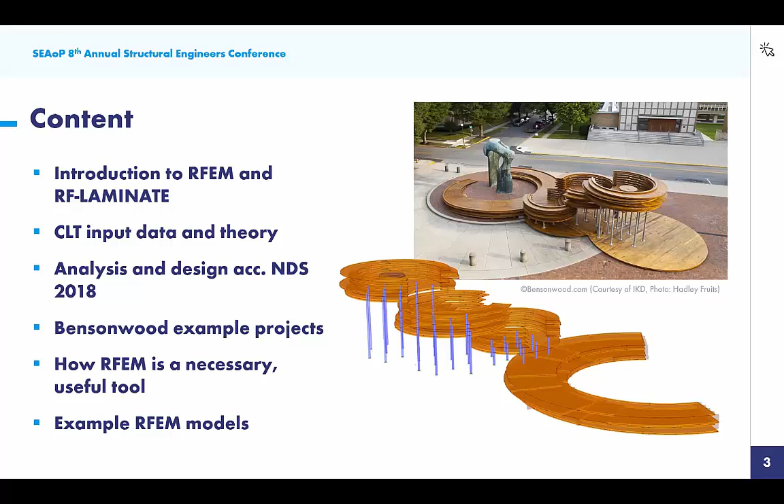Then I'll turn it over to Florian, who is an engineer at Bensonwood, to show you some real-world applications of cross-laminated timber, mass timber, with some example projects that they have worked on. He'll go on to talk about how they found RFEM to be a necessary and useful tool in these projects and to go through a few example RFEM models as well.

So I am going to go ahead and begin within our program RFEM. You can see that this is the main structural analysis program here, RFEM. It will provide a full analysis, so we're talking things like internal forces, deflection, support reactions. We do work with this add-on module concept to provide design of our elements, and that would include today we'll be looking at RF-LAMINATE, which provides design of cross-laminated timber.

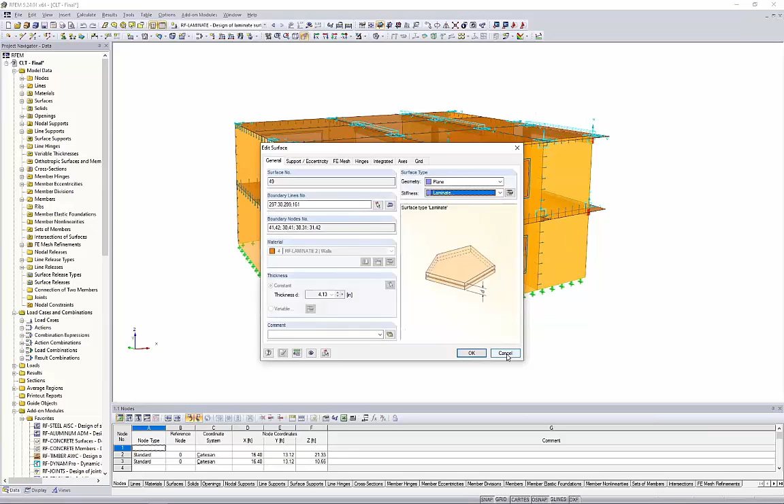For the sake of time, I have already modeled a two-story structure here, and you'll notice that we have several surfaces. If I double click on one of these surfaces, the stiffness type is set to laminate, and this refers to our RF-LAMINATE add-on module, which again we'll get into in just a minute on how we can actually accurately calculate the stiffness properties of CLT panels.

I've also combined this with member elements, so you'll see here glulam beams, which are dropped down below the bottom of the surfaces here for additional support. We have some glulam columns as well, so all within the same project here.

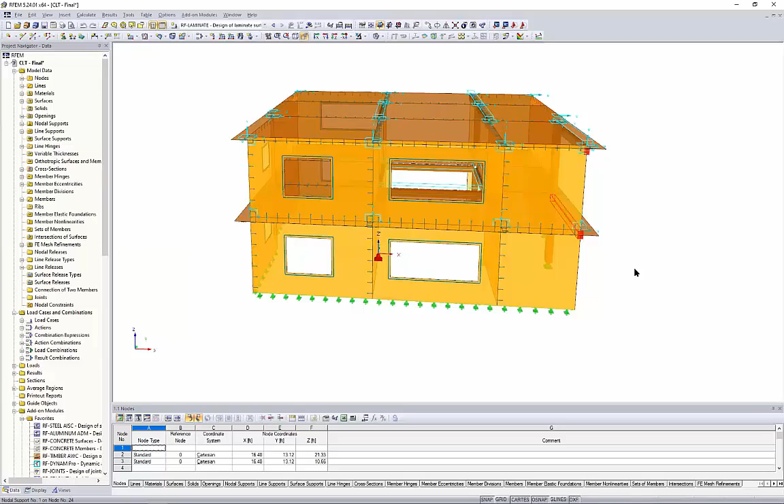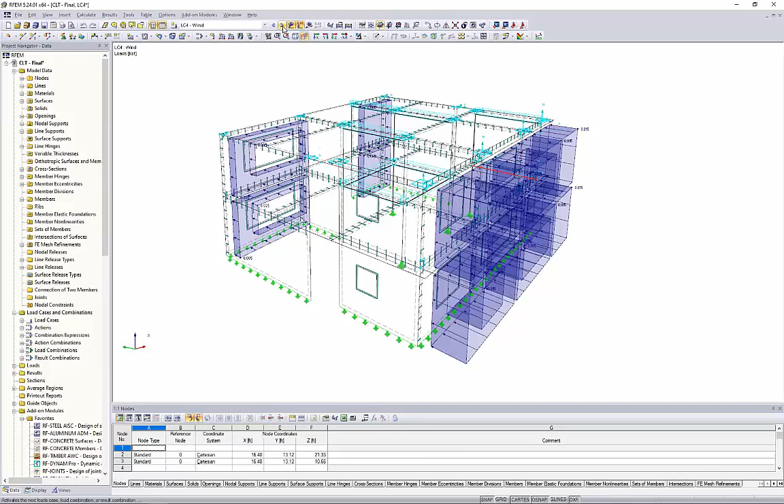I've also applied loads to this structure. These are just general surface loads. You can see here, maybe if I turn this to wireframe, it's a little bit easier. We have a dead load applied to the first level and the roof level here, a live load, simple snow load, again just an application at that roof level, and then we have a lateral wind load. So I went ahead and combined all these load cases into load combinations according to the ASCE 7. When we display these together, you'll see these gravity loads in addition to lateral loads kind of acting on the structure altogether.

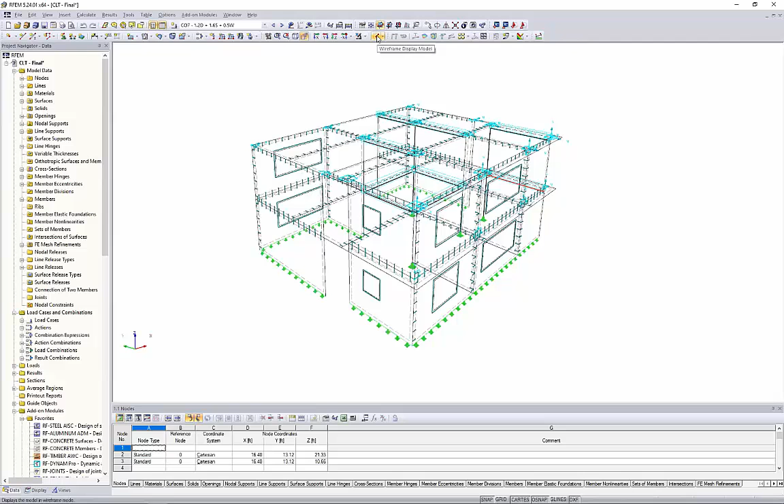But before we run this initial calculation, what's required here is to define the correct stiffness types for our cross-laminated timber. For this, we would utilize this add-on module RF-LAMINATE, and I can access RF-LAMINATE within my project navigator over on the left. When I say add-on module, it's really nothing more than just this dialog box that pops up within our main program.

So before I give you a quick tour here, let us jump back to the PowerPoint to kind of see what's happening behind the scenes with this add-on module, how it's working with RFEM, the main program.

So we know with cross-laminated timber that this is going to be individual layers oriented 90 degrees, and each individual layer has its own stiffness properties. So we're talking modulus of elasticity, shear modulus. In turn, these individual layers have their own stiffness matrix as well. So this is what eventually we're going to be defining within RF-LAMINATE, are these individual layers.

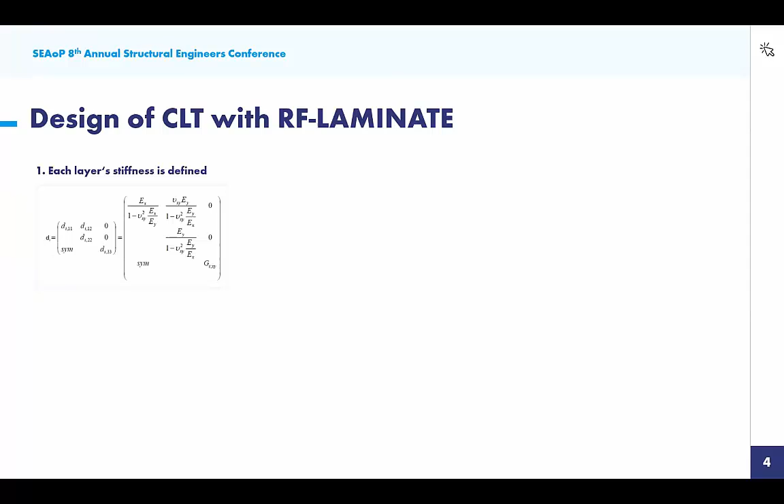Well, what we do with these individual layers is to create this overall panel. And what's required for this panel that we might use for a wall element or floor element is to generate the overall stiffness matrix. We call this the global stiffness matrix here of this panel.

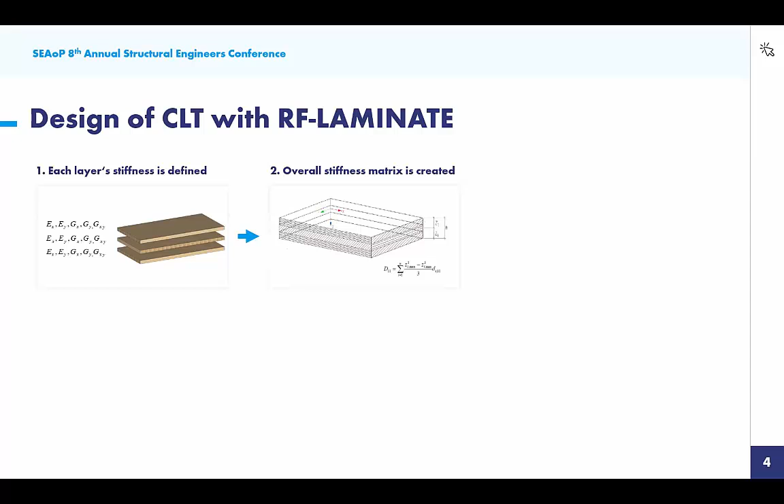RF laminate will automatically do this within the background using laminate theory. So you might see here a sample calculation for the D11 entry of that stiffness matrix.

We take this global stiffness matrix and export it from the add-on module back into RFEM, for the structure we were just viewing. We can go ahead and run the analysis, which includes dead load, live load, wind, and snow load. After running this analysis, we get internal forces for each one of these CLT panels.

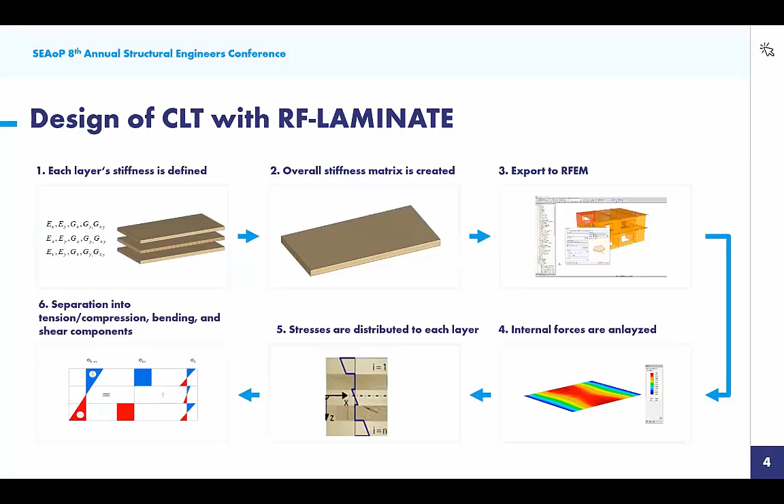These stresses from the analysis are ultimately what we're comparing with our design stresses, or limiting stresses, based on the material as well as the NDS code. From this, we finally get a design ratio for our CLT panel. So that's what's going on in the background here.

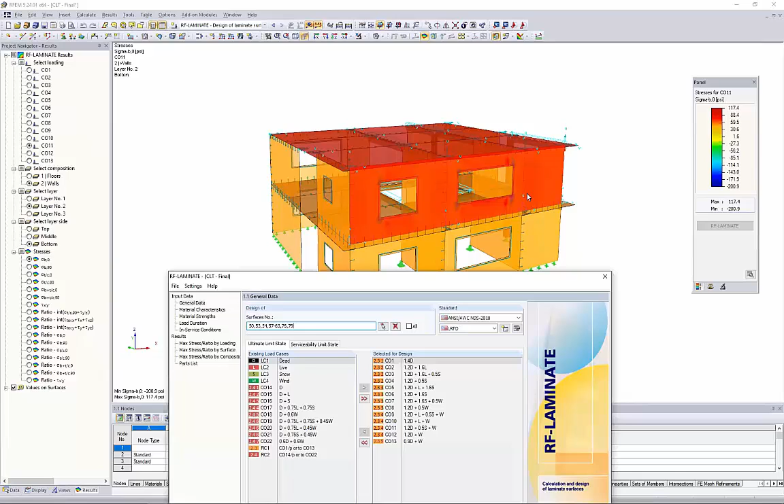Jumping back to RFEM, just to give a quick tour of what this add-on module requires as input, you can see that I can choose the surfaces I'd like for design. Currently, I've only selected the roof panels here as well as 3 wall panels, but we could design all at once if we wanted to.

Over on the right-hand side, we're going to choose our design standard. You can see the NDS - we know recently the NDS added CLT design with the 2015 standard, and we also have the 2018 standard. We have the Canadian standards, since that was recently implemented there too, and of course the Euro code.

For the ultimate limit state design, we would likely move our LRFD load combinations over here to the right, simply because I'm choosing the design method according to LRFD. Notice the ASD is also available here.

We can also check serviceability for these panels - that's deflection checks, and I'll show you later where we can set that limiting deflection ratio. For this simple example today, I'm not doing deflection checks, but we'd probably move these unfactored ASD load combinations over to the right-hand side.

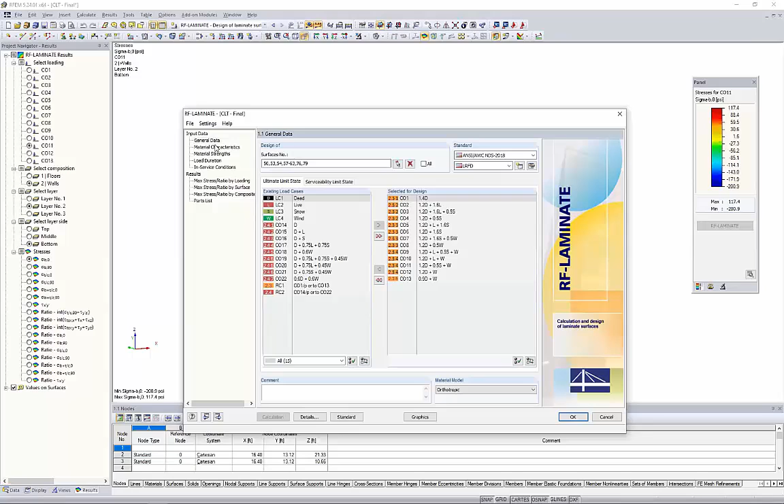It's really as easy as moving down these tables from top to bottom. So we'll take a look at this next table, material characteristics, which relates back to the PowerPoint model where we're defining these individual layers for our CLT panel.

For the first layer, we can access our material database and use our filters on the left to filter to timber. We might choose North America, and the NDS 2018, and here's about every single timber material available within the standard, along with all of the relevant material properties.

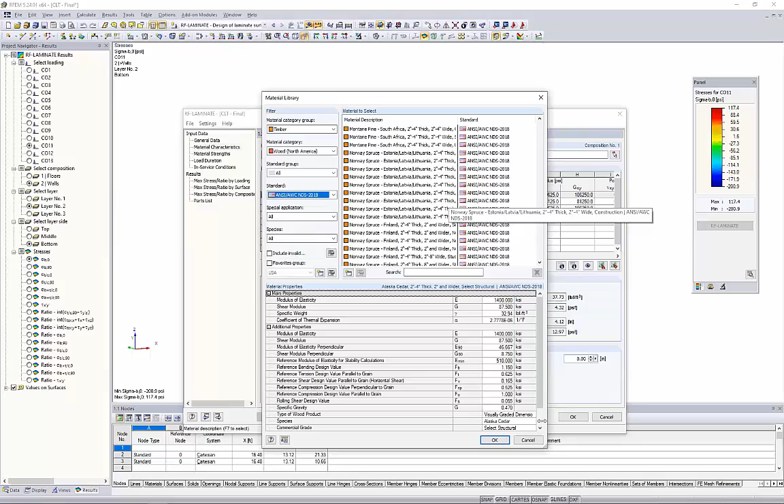You can use these search functions if you need to as well. Once you've determined the material for that first layer, you select it, input the thickness, and notice in this third column is the orthotropic direction - 0 degrees, 90 degrees, 0 degrees, and so on.

That's the definition of CLT, orienting those layers 90 degrees from each other. Then we get the modulus of elasticity and shear modulus automatically brought in from that material database. We'd continue to do so for additional layers, which might be for a custom layup, a custom type CLT composition.

We could save these layers so that we can always use them in a future mass timber project within RFEM. The other option is to import the layers from the library.

Within this option, you can see a drop-down box of various manufacturers. For CLT from the North American market, some names that might sound familiar are Nordic Structures, Smart Lam, Structurlam, and then we just have the general PRG 320. For example purposes, we might move forward with PRG 320 CLT according to the US.

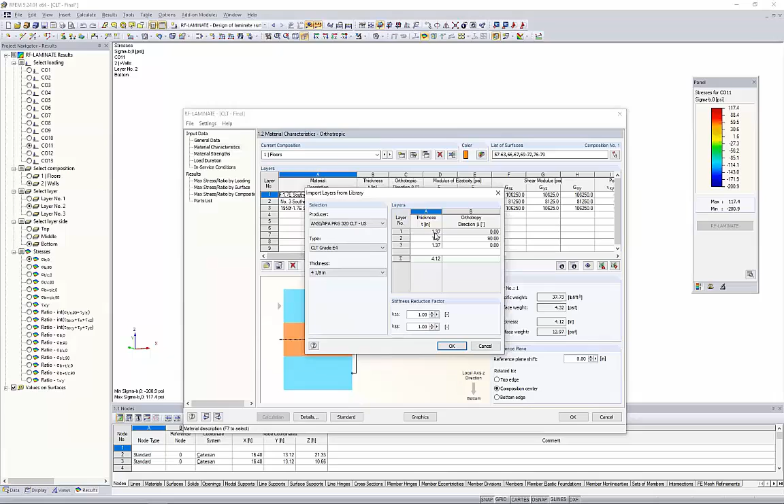Once we select our manufacturer, we choose our grade from the drop-down, then our thickness, which influences the number of layers for our CLT panel. Notice that the layers are automatically brought in, the thicknesses, the directions. When we import that in, this entire table will be filled out for us based on the manufacturer's products. So that's another option if you see your manufacturer in there. Otherwise, you can create custom layups and save them to your library.

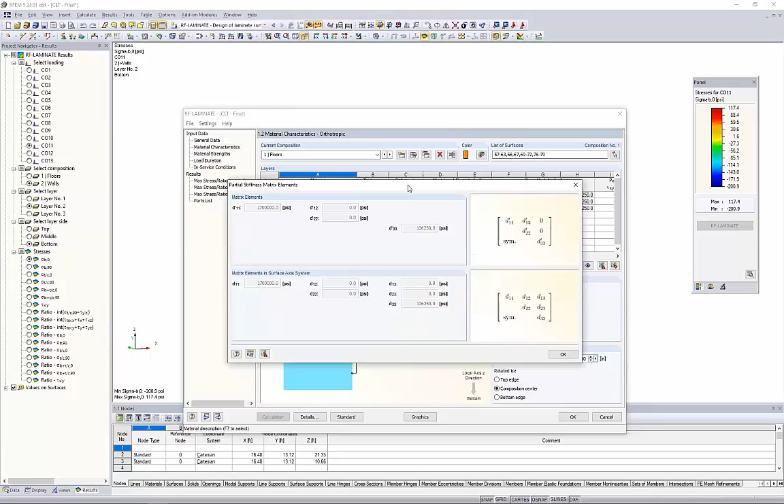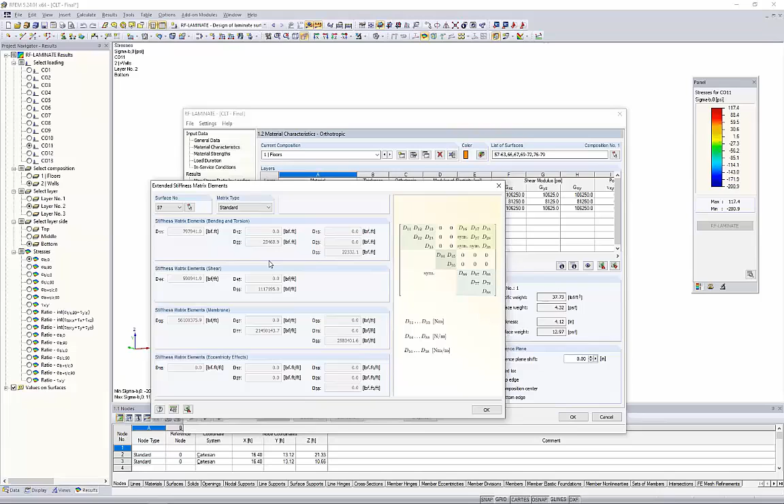Relating back to the PowerPoint, each individual layer has its own stiffness matrix, so we can view the individual stiffness matrix for that single layer. The program takes it a step further and calculates this global stiffness matrix for our panel. If you're not using a program where you can individually define these layers, you'll need to put in the global stiffness matrix into your relevant FEA program. This might be something you get from the manufacturer, but ultimately this is the information we need to export back out to RFEM.

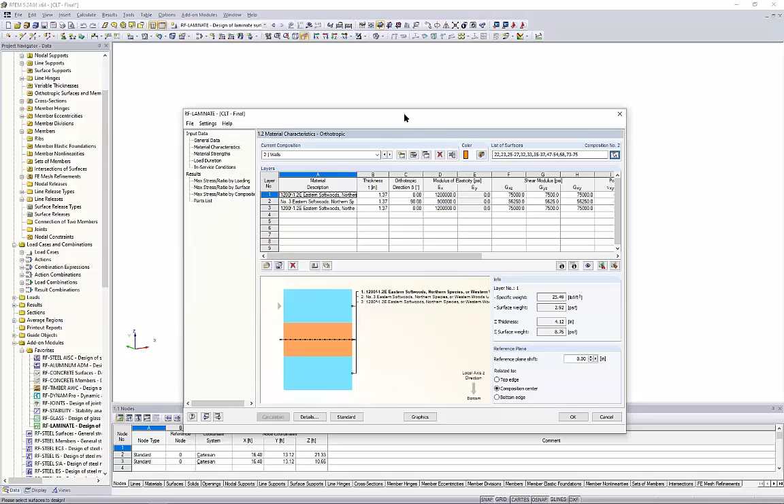I named this composition 'floors' and applied it to all of my surfaces that are floor elements. We can create different compositions for the roof versus the first floor - that's all possible. Exact same concept for my second composition, my wall elements, and this time I also just have 3 layers for my wall elements. Perhaps we have 5 - you can see I've applied these to all of my wall elements back in the RFEM model. Before we move forward, there are some details within these compositions that are really important for analysis.

We can visit those under the detail settings here. You'll notice we have several options we can check on and off, as well as stiffness reduction factors. To discuss this further, I'm going to jump back to this PowerPoint.

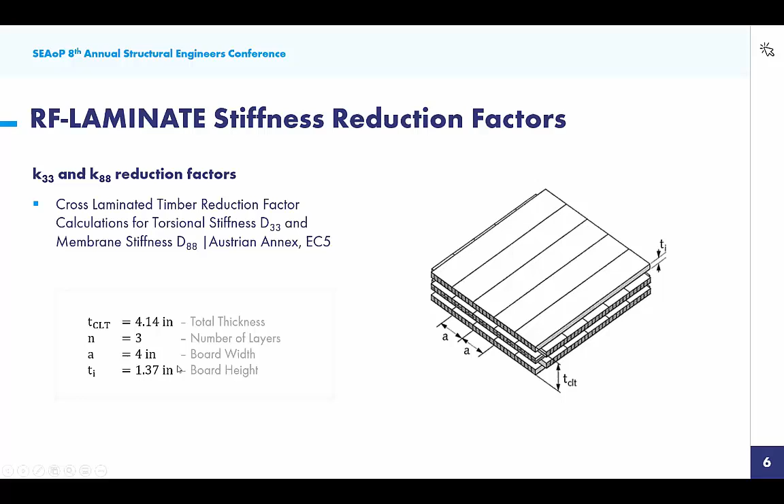We also have some additional variables given directly in the EC5 Austrian Annex. Depending on the number of layers—3, 5, or 7—you'll see variables here, PD, QD, and so on. These are also needed for the K33, K88 equations, and those equations are listed here, laid out quite clearly how we need to reduce the stiffness when we don't have that edge bonding. We take all these variables from the previous slide and from our table here, and we're ultimately calculating K33 as 0.435 in our example today.

This is the information we apply directly in the program under those composition details. Same concept for K88, we're going to apply those directly here. Now, for some manufacturers, these values are included if they don't have edge bonding; for others, maybe we weren't able to get this information. So always double check for your particular project, your manufacturer, and which CLT panels you're using. And again, not specific to RFEM, but this would be a stiffness reduction you'd want to apply with your own analysis tools.

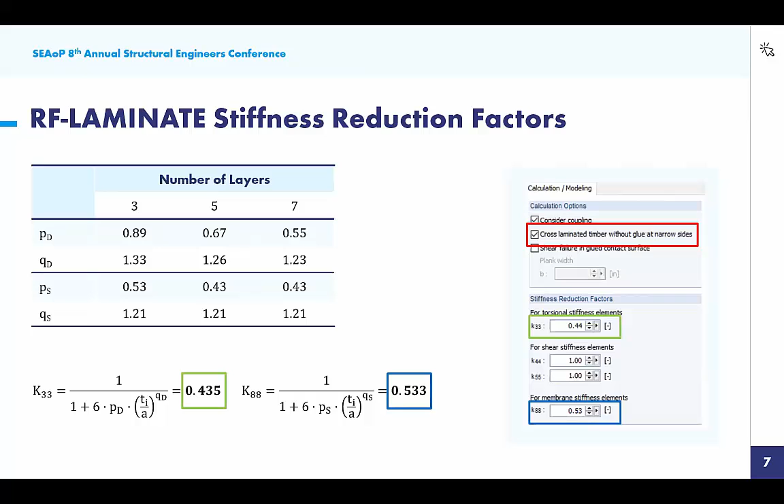The final consideration here for these check boxes at the top is shear failure in glued contact surface, and this all relates to torsion. We're really mostly concerned with torsion when talking about CLT wall elements loaded in plane—probably not so concerned when talking about floor elements, for example. This is also only a concern when we don't have glue at the narrow sides again, so this first checkbox must be checked. That will make this third checkbox available so we can take a look at torsion considerations.

Just a small tip: it's really important to set the FE mesh back in RFEM. Our FE mesh settings for the length should be approximately equal to the board width—in our case, that would be 4 inches—just for the most accurate analysis.

Once again, the NDS standard, the CSA standard don't address torsion whatsoever, so we refer back to the Eurocode 5, the 2010 version. I think we're all kind of in agreement that the European standards have been doing cross-laminated timber much longer than what we've seen here in North America, so it's pretty safe to say we can refer back to these standards for considerations such as torsion.

Once again, complete interaction equations are given quite clearly directly within the standard, and we can see those interaction equations in the lower left corner here. This includes 3 different terms: the first term shown on the right-hand side, the second term lower right-hand side, and then the third term would be those internal forces and stresses directly from the RFEM analysis, to ultimately give us our design ratio for torsion for our wall elements.

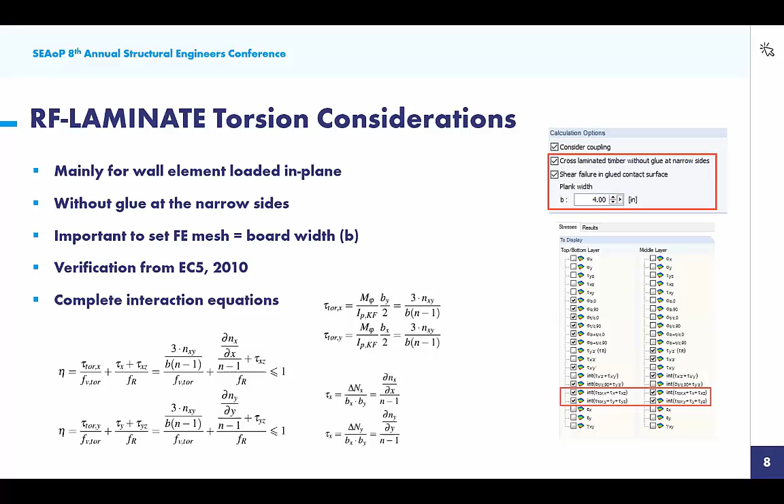Over on the right-hand side, you'll see we have all of these different stresses available to us within RF-LAMINATE, and it's pretty overwhelming. So what we've tried to do is only check the boxes that are relevant for CLT design. This includes the top and bottom layers as well as the middle layers, and torsion is actually not one of them checked on by default. I'll show you in just a minute how we can go ahead and turn those on in order to take that into consideration for our results.

So we'll go back to RF-LAMINATE. If you remember, we still have this dialog box open, and we're currently looking at my wall elements, and we are considering coupling. We don't have glue at the narrow sides. We are concerned with torsion, so we want to go ahead and put in our plank width, or board width, equal to 4 inches.

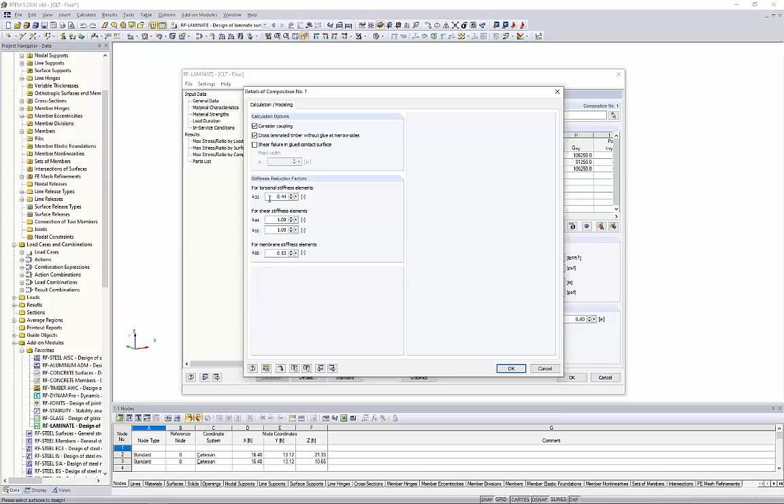And just like I showed in the PowerPoint, I calculated K33 and K88, which I'm inputting in here as well. So for my floor elements, if we jump back to those, same exact concept, but I'm not concerned with torsion here.

So we can leave that option checked off, but we're still applying that stiffness reduction factor K33, K88. Once we have input all this information for those material characteristics, we can jump down to our next table, material strengths. Really not much to do here; everything is brought in from that material library. It's just showing us the strengths for bending, tension, compression, and shear. This information, based on the material properties in addition to the NDS factors, is what's going to give us our limiting stress values.

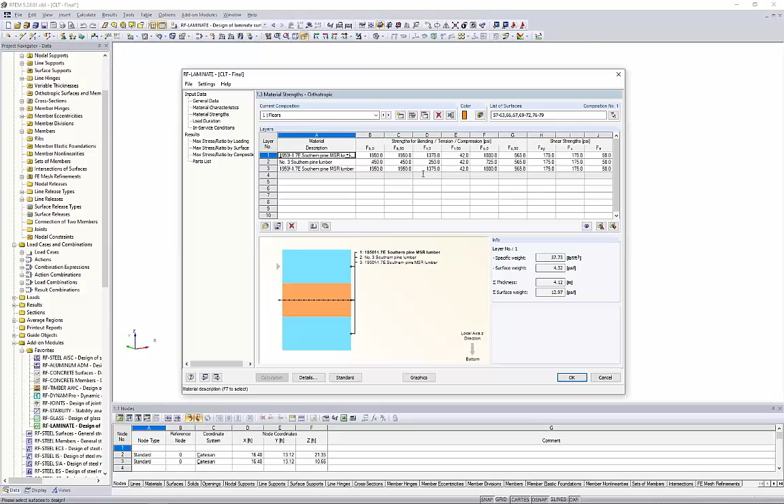And when we're talking about the NDS factors, we might be looking at the load duration factor, which we can see is set within this next table. So dead, live, snow, wind—we would set the load duration factor here. In-service conditions: is your CLT panel dry, is it wet, what is the temperature it's sustaining? All of these factors are actually found under the standard tab.

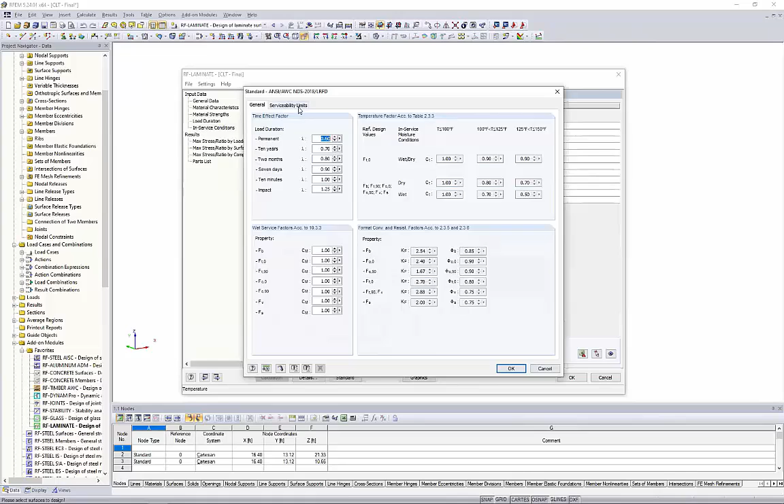So we can see here the relevant factors that are going to be applied for design purposes. You'll also notice the second tab here, serviceability limits—that's what I was talking about. We can also check deflections, where we set this limiting deflection ratio directly within the program. We're not checking serviceability today, so this isn't applied, but just to let you know it is available.

So before we're ready to run our calculation, remember I wanted to turn on the torsion checks, so we can do that under the detail settings. And once again, here's this long list of all these different stresses that we can compare and give design ratios—way too overwhelming. So we have just the default settings here, which is likely most relevant for your CLT design, but here in the lower portion is where we can activate the torsion checks as well.

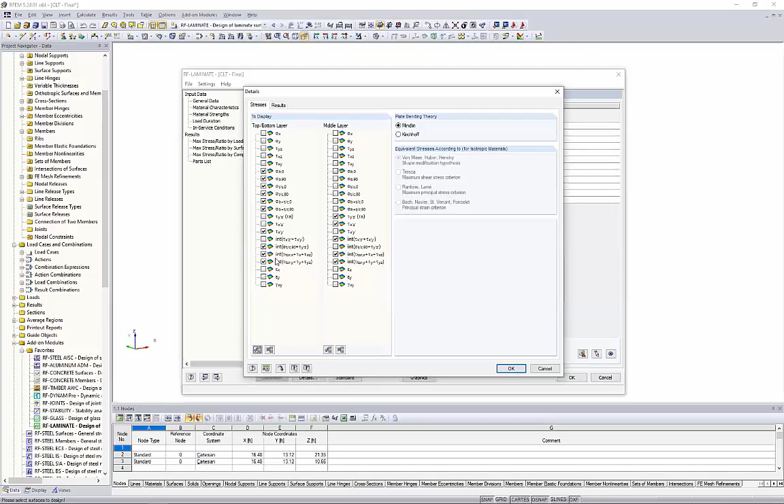So we're almost ready to run that calculation, but before we do so, let me jump back to the RFEM program. Again, this is just our main structure, and you'll notice that we have all of these blue symbols shown everywhere. So we might be wondering, well, what are these used for and why are they relevant? Again, incredibly important for the true properties here of our CLT structure.

So let's begin with a couple of adjacent panels, and I'll highlight these and we'll take a look at just the visibility by these selected objects. So two CLT panels side by side, and I'd say in most FEA programs, when we're modeling two surfaces side by side like this, the program is going to assume that we have a fully rigid connection between these two panels. And we all know with CLT design that that's not the case.

Rather, we're going to be utilizing some type of screw connection, where we have this partially fixed connection, but definitely not a fully rigid connection. That's why we would utilize in the program what's called a line hinge. So when I double click on this line hinge, you'll notice I have the ability to fully release the moment between the two panels. So that's probably one consideration we want to take.

We also have the ability here along the joint length to set some type of spring constant, and this might be for the slip of those screws between the two panels. For my example today, I set this to 30 kips per square foot, but this would all be relevant to the type of CLT connection that you're using for your projects. The other 2 degrees of freedom here, translation in the Y and Z direction, are left at fully fixed.

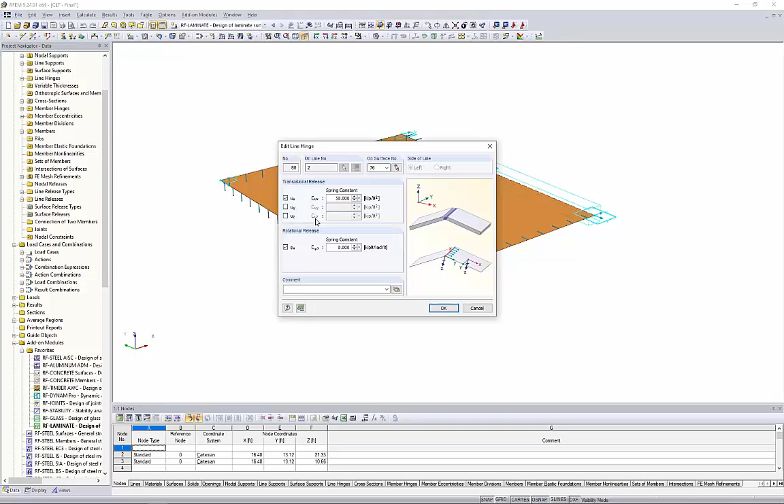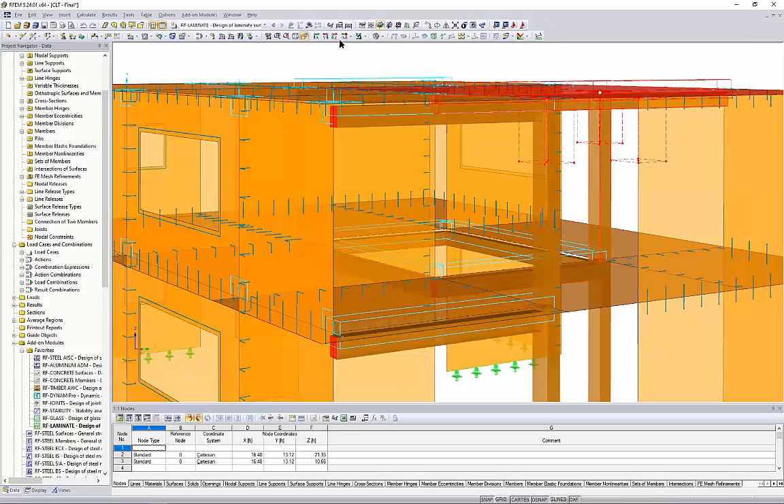So this is definitely something that you need to apply, and this is why you're seeing, when I cancel out of this visibility mode, these line hinge symbols shown everywhere throughout the panel connections. The other symbol that we're looking at here are these long blue lines. And for this, let me go ahead and create a user-defined visibility here, just so that this is a little bit more clear.

Similar to our adjacent panels, we have these beams that drop down below the CLT panels for additional support, these downstand glulam beams. Very similar to what we see with the CLT panel connection when they're adjacent to each other, this assumes a fully rigid connection between this beam and the CLT panel. We know that's not the case because of these screw type connections, so we need to adjust this fully rigid connection here.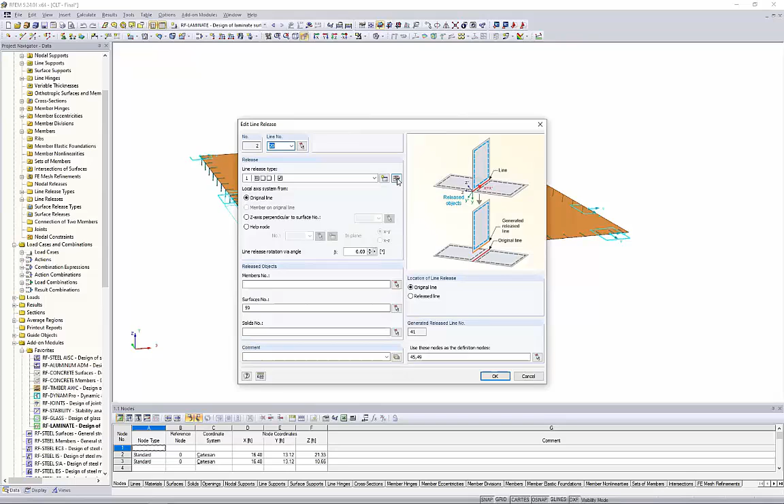We do so with what's called a line release. When I double click on this line release, it's actually very similar to a line hinge, just a little bit more applicable to beam to panel connections. With this, we can define the line release type by releasing the moment, and we can see that here. We're also going to apply that stiffness slip to the joint along the local x-axis of the line, so 50 kips per square foot. The other two we kind of leave as fully fixed.

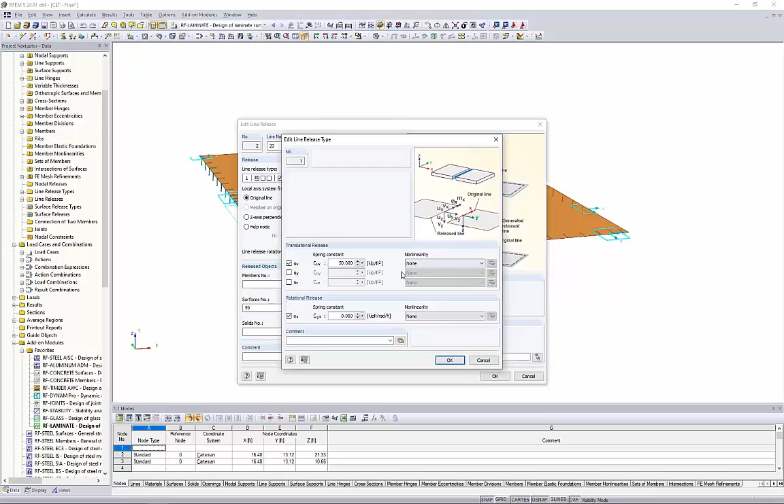Now another advantage of a line release over a line hinge is the ability to define nonlinearity, so you're going to see here friction, partial activity, and so on. Where this might be relevant is in the vertical direction. Maybe we have a scenario where we'd like full force transfer when the CLT panel is bearing down on the member, but in the event of uplift, we want that to be completely released. That's all possible with these nonlinear applications. So that's why we have these line releases everywhere a beam connects to the panel above it.

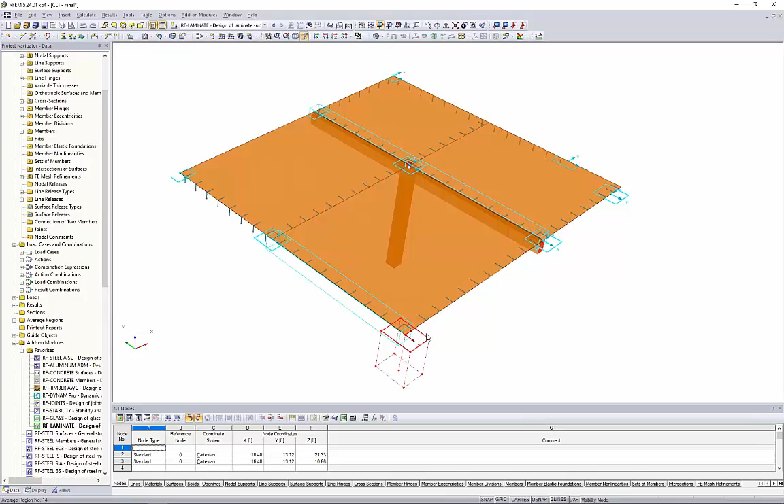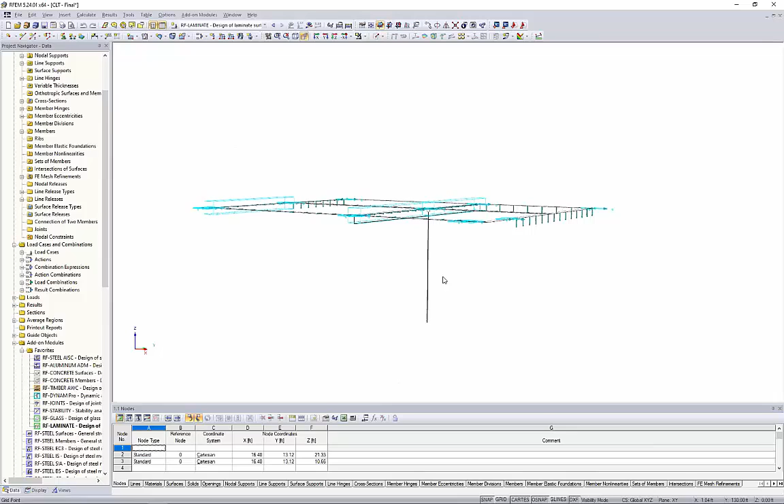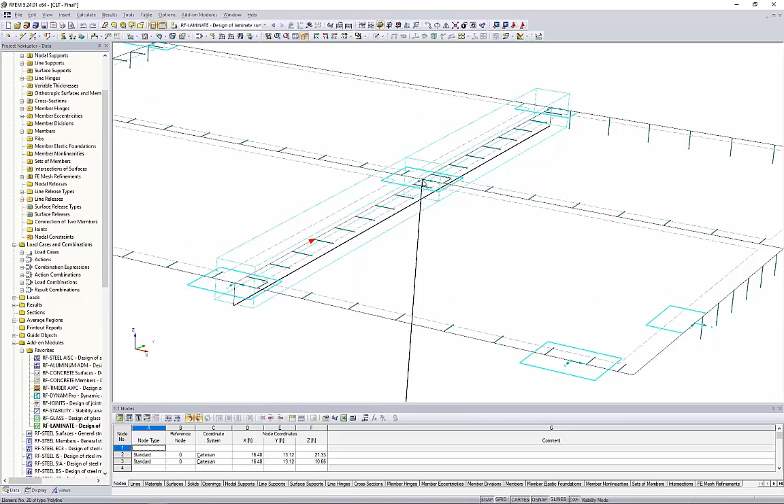Now the final application here, which we'll notice, is these rectangular blue squares. These are used for singularities. Where might we see a singularity? Well, we convert this to a wireframe view, and we know from general FEA programs—this is true not just for RFEM but for all programs—that members are represented by single line elements at their centroid. So this column is just a single line element, framing into these 2D surfaces at a single tiny FE mesh point. You can imagine the amount of stress or internal forces, this huge spike we're going to see at that single FE mesh point, simply because we don't have great load distribution. So again, this isn't unique to RFEM, but singularities happen in all FEA programs, and you have to find some approach to level those out.

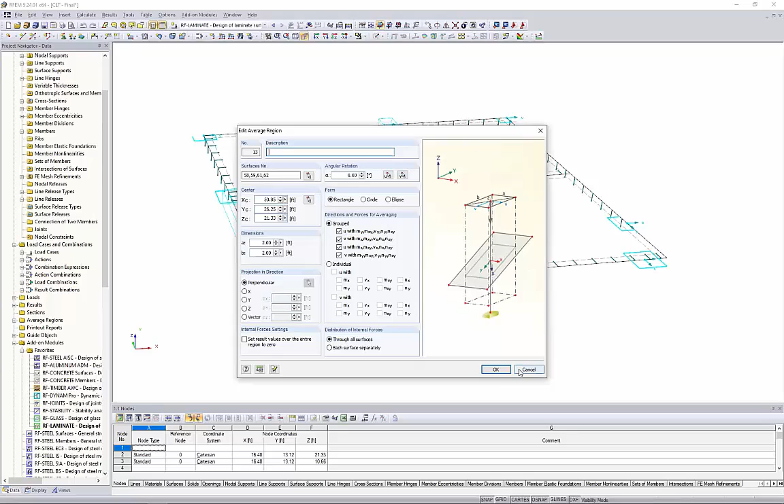In RFEM, we can apply what's called an average region at these locations. An average region is exactly what it sounds like—it's going to average out the forces over a specified dimension. I've set here 2 feet by 2 feet, averaging out the forces in all four directions, and we can smooth out those high peak forces, internal forces and stresses that we know aren't going to exist in a real life application, but aren't really avoidable when we're talking FEA design.

So canceling out this visibility mode will explain why we're seeing all of these blue symbols everywhere. Now these average regions can also be taken into consideration within the add-on module RF-LAMINATE.

So once we've applied all these line hinges, line releases, and average regions if necessary, we're finally ready to run the calculation. We'd hit calculation here within our add-on module, and we're presented with our results in table format, where we can view the max stress ratio by surface, for example.

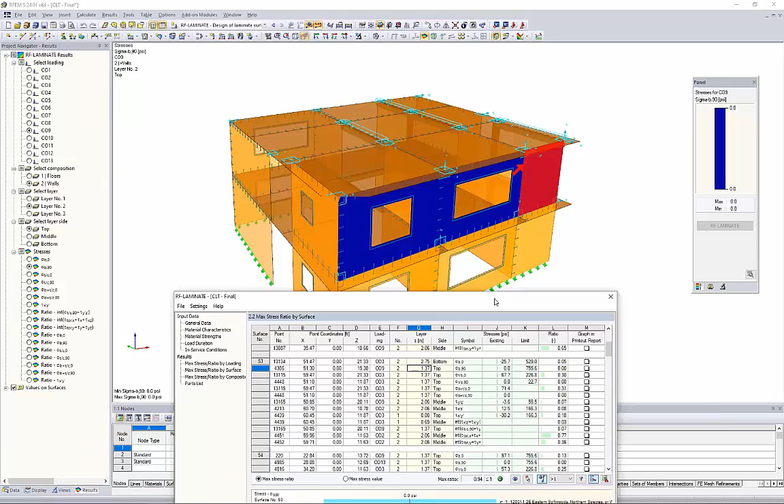If I pull this down here, you'll notice as I'm scrolling through this table, everything's synced up in the background to highlight the surface I'm looking at. It might be a little difficult to see, but there's a red arrow pointing exactly to where my controlling stress point is for that particular check. That's a nice feature if we're trying to see relative to the table, in the structure in the background, exactly where we're at.

Taking a look at the actual data presented in this table, we're going to see each individual surface in each one of these categories. We'll see the bending stresses, tension compression stresses, combined bending tension compression as well as shear. This does include rolling shear checks as well, and those torsion checks we've also activated.

Within column J here, we're seeing the existing stresses, purely from the analysis, which if we remember back to the PowerPoint, we're bringing in these stresses and separating them out to each layer into bending, tension, compression, and so on. Column K is the limiting stresses, based on the material as well as the NDS standard and those factors being applied. Ultimately in column L, this is where we're getting our design ratio.

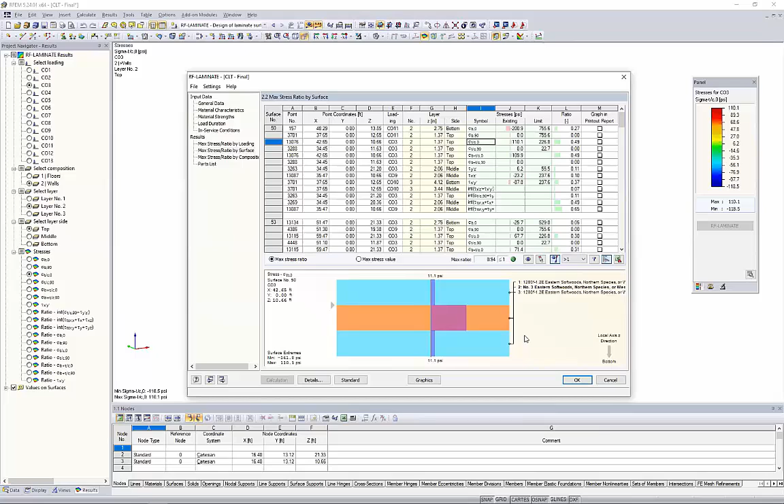We can go ahead and filter this information, or export at the click of a button to Microsoft Excel if we need to sort further. Ultimately, we're seeing a max ratio here of 0.94 for our example today. We have our green smiley face because it's less than 1.0. As we know from the PowerPoint, I talked about the stress distribution for each of the layers, and we can see those stress distribution diagrams shown here as we click through all of these different applications.

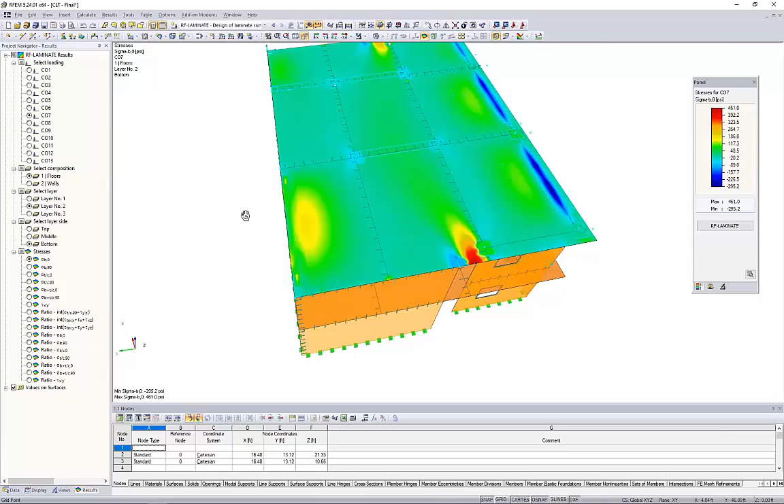In addition to all this information being shown in table format, we can always jump to the graphics view, the results from RF-LAMINATE. We can see it selected in our drop-down box, viewing them graphically back in RFEM. We can scroll to different load combinations if interested in those results. We can take a look at our wall elements, but we can also switch to our floor elements, and with additional options we can examine those further.

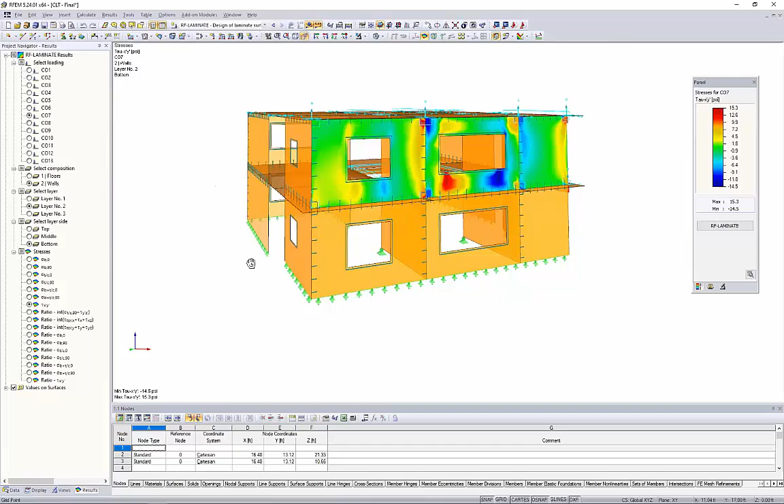For floor elements, we might be interested in the bending stresses, for example. We can also take a look at the tension compression forces, and shear, of course, is something we're also considering. Jumping back to our wall elements, we're probably most interested in shear, but things like tension and compression are also shown. And of course, we can view the design ratios in color formats as well, so we can print these pictures into our report and view the results in something other than table format with numbers.

Hopefully this was just a quick introduction to CLT design. Some of the information to take away from this first part into your own programs or design methods is consideration of the global stiffness matrix—do we need to reduce some entries such as D33 and D88 if we don't have glue at the narrow sides? And back in the RFEM model, things like line hinges to make sure we don't have a fully rigid application between adjacent surfaces, line releases, and so on.

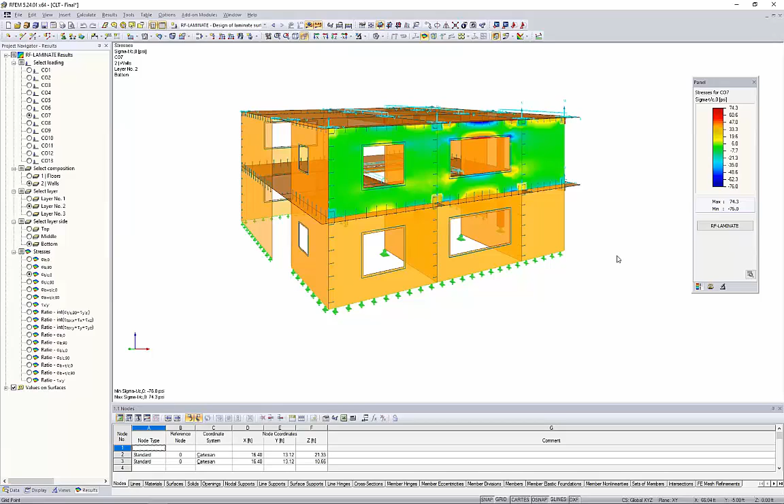With that said, I will go ahead and turn it over to Florian for the second part of today's presentation.

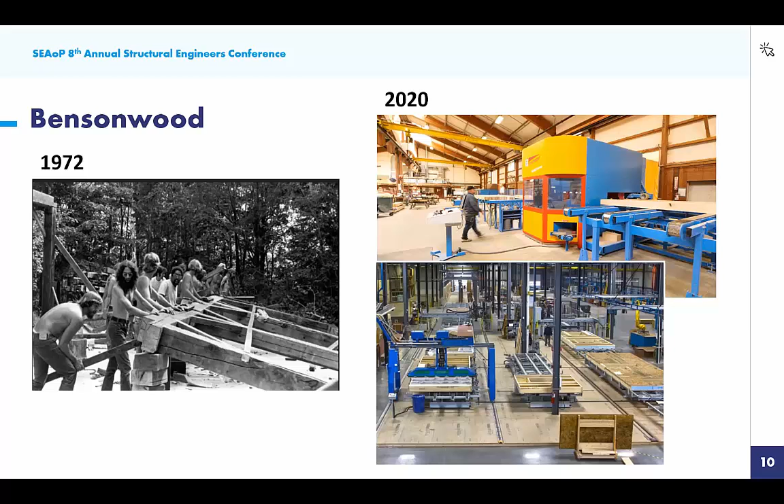The lower picture is our panel shop that we opened in 2017. It's highly automated. The panels get built and transported through the shop on some kind of car, moving along. The nailing is automated, and on the left you can see where the cellulose insulation gets filled. A little later in the shop they get put upright and windows get installed - that's what it looks like today.

All right, enough about Bensonwood.

This is the first project I wanted to show - it's called the Conversation Plinth. It's more of an art project than a building. It was open to the public - you were able to walk on there and stand on top. But it was just a temporary construction. It is CLT, and it's not really protected - it's outside, so it was just a temporary installation.

But of course it had to be fully calculated because people were using it. The project is made out of hardwood CLT, which is pretty unusual. There was an initiative in Indiana to promote the use of locally grown hardwood, so they came up with this installation and a custom layup of hardwood CLT.

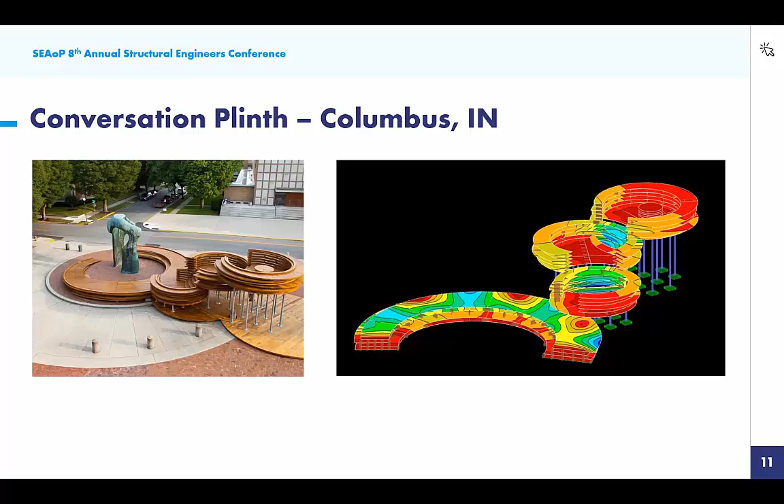All right, I think that's it about that project. The next project I would like to talk about is this Haus Gables in Atlanta. The architect on this is Jennifer Bonner.

When this was designed, she had in mind to really celebrate the use of CLT. So everything in that building is basically CLT - the walls, the roof panels, the floors, partition walls, even the guardrail for that balcony. She was really trying to use it as much as possible and test out what's possible with this somewhat new material.

There are no beams in this roof structure or in the floors. It's all CLT floors that support themselves, and then there's some walls, but especially in the roof, you can see how this could be utilized.

The only steel beams are in here. You can see those too, because the span was a little too long and the wind deflection didn't quite check out. There's no floor behind this, and we didn't want to increase the wall thickness just because of that one situation. So we have two steel beams in there, but everything else is just CLT panels.

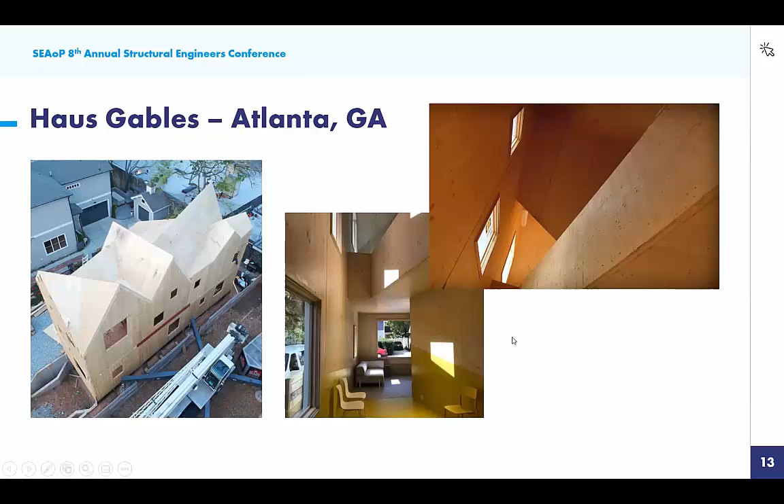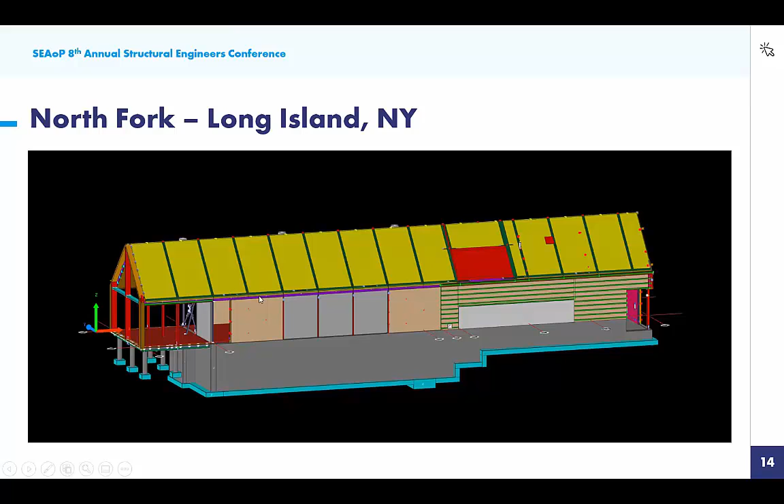This is a project on Long Island, a collaboration with Lake Flato, the architects. What we were trying to do here - let me skip ahead a bit - this centerpiece from here to about there has no floor inside, and they didn't want any tie rods in there. Moment frames didn't seem feasible, and spanning a ridge that long wasn't really an option. They just wanted one great open space.

It's about 50 feet long, and so what we came up with is using the roof - a CLT panel you can't see in this picture - in the roof, stitching them all together and creating this as a deep beam diaphragm. So you wouldn't need any tie rods or moment frames; there's just these braced frames at the end to take all the wind load and outward thrust that otherwise needs to get resolved from here to the end.

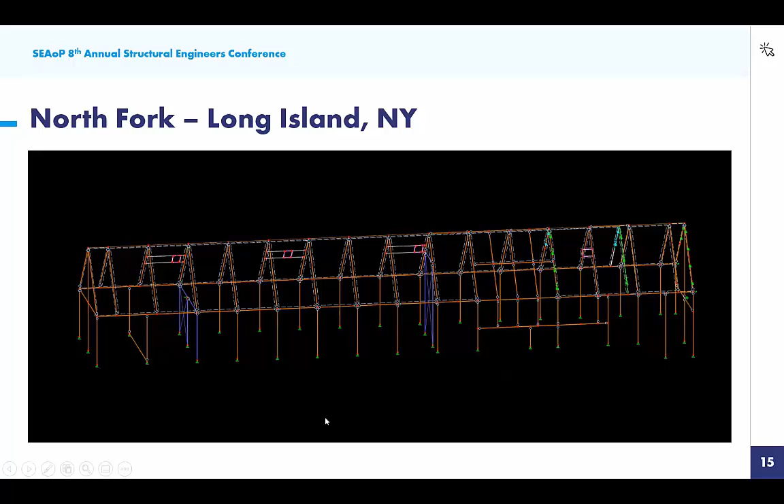This is the catwalk model that we used, and then this is the RFEM model. For this project, I'm actually going to switch over here. So that is the actual model. I did also work on that, so I can talk a little bit more about this one.

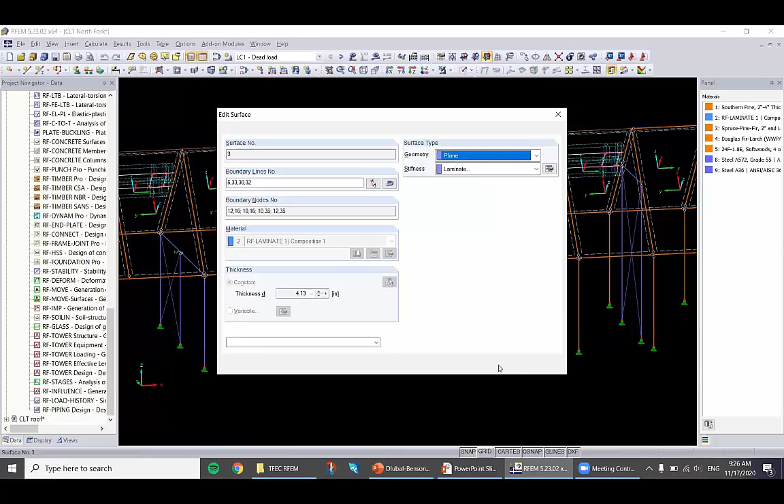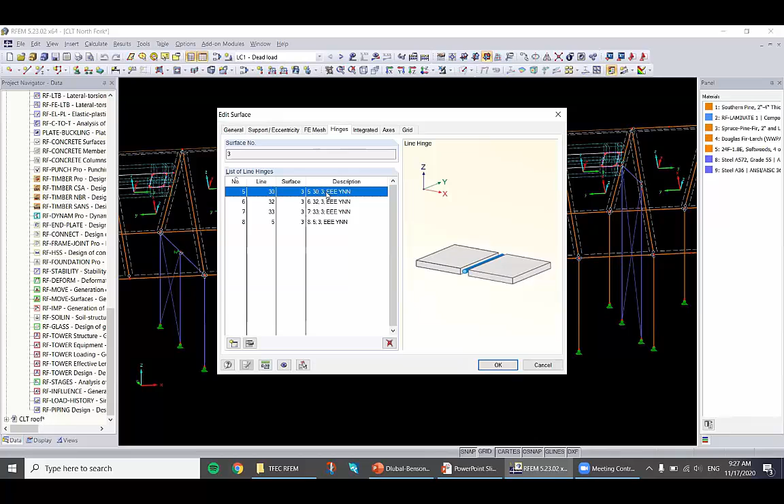I'm going to open one of those panels. As Amy explained earlier, we're using the laminate module here, so the whole built-up is defined in the other module. I'm opening this to show how those hinges work. On all four sides of this panel, there's hinges defined, and the rotational release is always set to zero because obviously there's no moment connection there. And then we went so far as to define all three of the other connections with springs.

This is a bit of a process, but it's very important to get right because it has a lot of influence on the stiffness of the whole building and deflections. The way we did it here is we would build the model with all this set to infinite stiffness, then run the calculations, look at the forces, and come up with a screw size and screw spacing that would work.

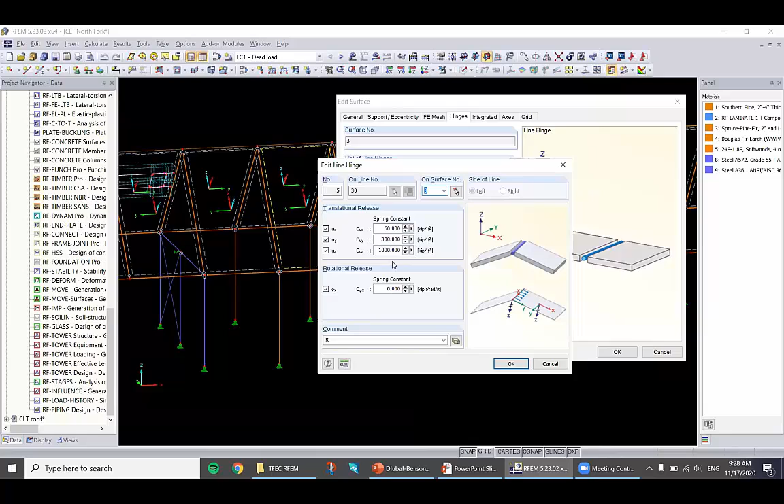Then we put this into an Excel sheet, looked at the stiffness that would provide, and put that stiffness into those boxes, ran the calculations again to see if the deflections and forces check out. We do this for a couple of iterations until we're happy, until we don't feel like there's a ton of screws - even though there still are - and the deflections are still acceptable.

That kind of process needs to get done for a lot of those connections. This one here is different because we're collecting a lot of the load along this one where the braced frame is. I'm going to show some results.

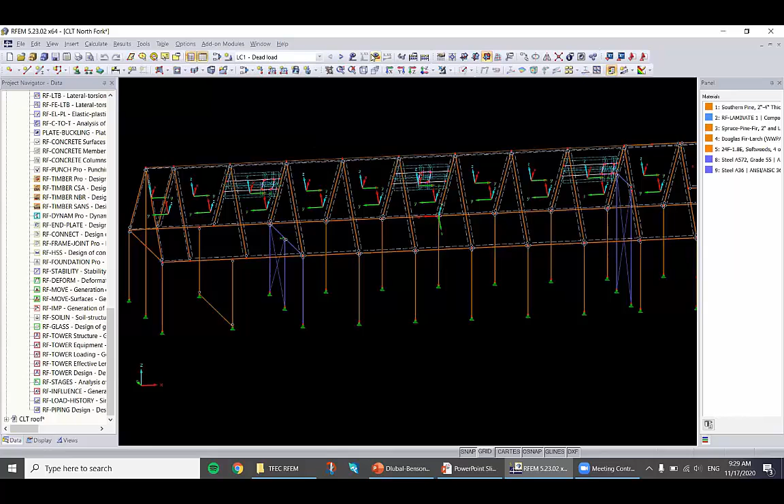What I found most interesting is the deflection of this - that was our main concern. You can see it's on Long Island on a bluff, so the wind loads were pretty significant.

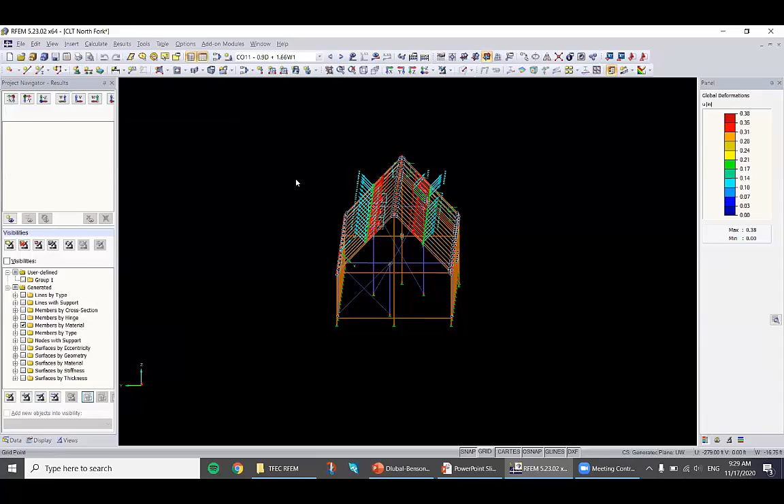Unfortunately there's no results for this one. Yeah, so you can see the results here. We analyzed the whole building as one model, which we usually don't do, but in this case there was just no way around it. You can see the drift that we're expecting here is about 3/8 of an inch, and that's also what we wanted to limit it to.

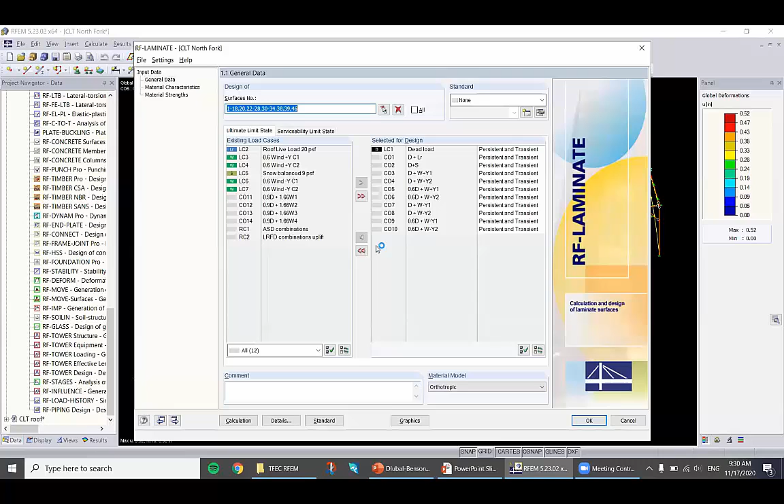I'm going to jump real quick into the module - Amy was talking about that before. I'm just going to go over this from a real-world example that is standing in Long Island as we speak. So what we used is Nordic CLT in this case.

It's from Quebec, Canada. They use black spruce, often very small dimensions. They have very small trees, but they glue it all up into big beams and CLT panels.

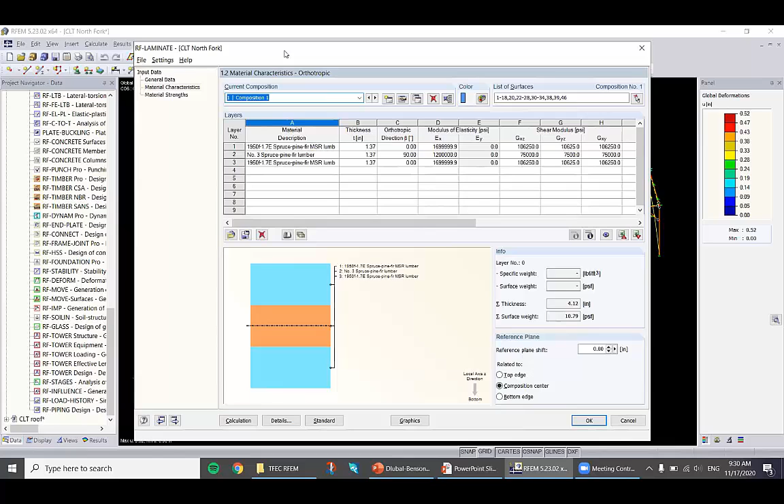In this case, we weren't so much interested in the actual span capacity. There were rafters in the roof, as you saw in that one picture, so the span wasn't really the main focus. It was more the focus on building this into a nice diaphragm, so a simple 3-ply was good enough.

It's very easy to import this. Nordic Structures is built into the program, so you just pick your manufacturer, and then the type is US. They only really have one type, and then they offer different thicknesses.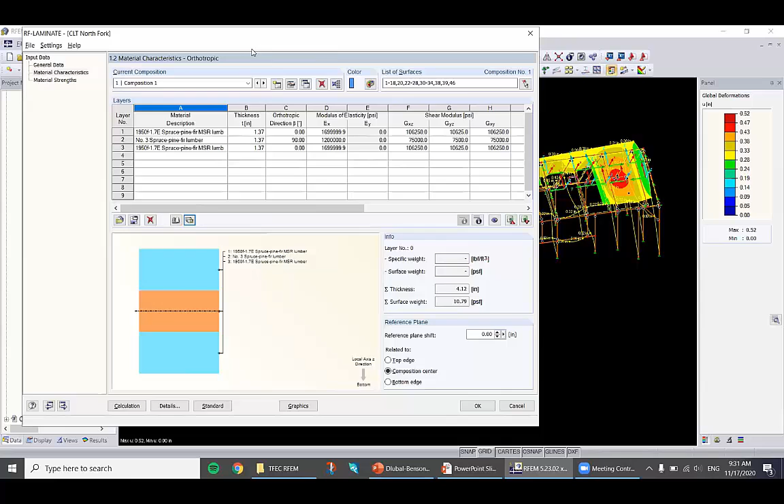Yeah, so that's how that module works. I don't have results in here right now to show, so I'm going to go back to the presentation.

That's what it looked like on site. You can see the CLT here - those are the actual CLT panels. They were on the outside; insulation was on the inside.

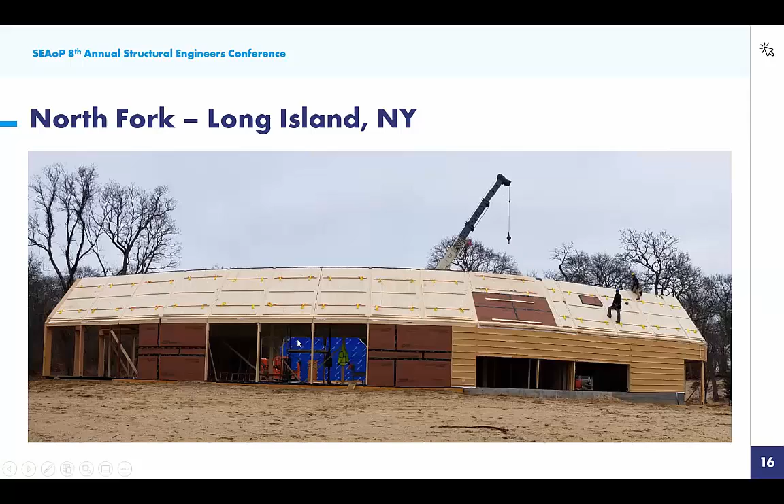And that's the great open space that they were looking for, and that we were able to achieve without the use of too much steel, and definitely without moment frames.

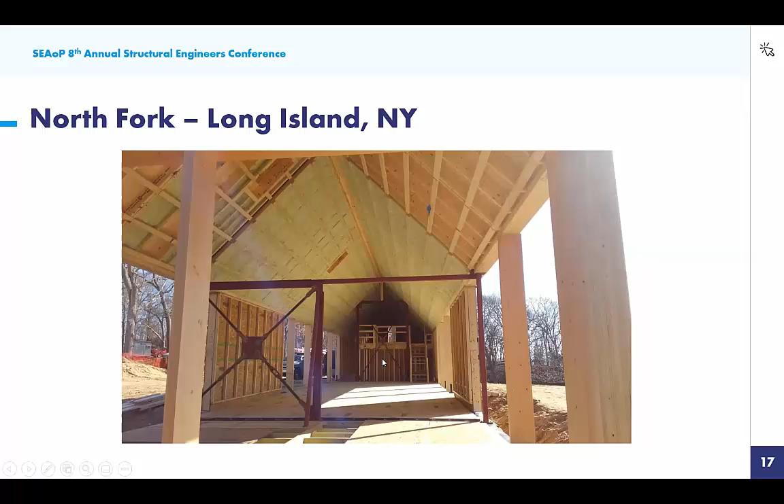Someone might ask, why would you need CLT for that? That's a good question - it's not necessary. It could have been done with sheathing as well, but I personally wouldn't have felt comfortable doing something like that with just, I don't know, 1/2-inch OSB sheathing. The forces were pretty high, and I don't think that would have been a good solution.

This is another project - we never got to build this one, unfortunately, it was just a concept. It's in Washington D.C., and the architect was looking for some kind of folded roof structure that was self-supporting. This is the CLT, the RFEM model.

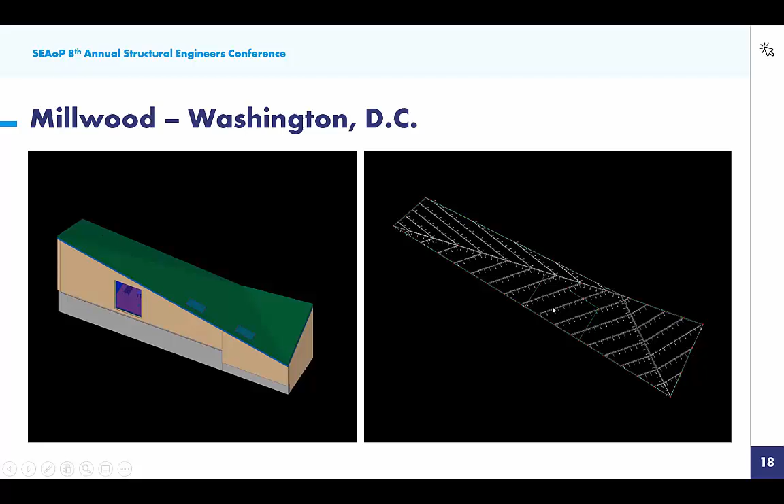We decided that CLT would be the easiest way to do this, again due to the biaxial bending capacity and the high shear capacity. There's support all the way around, and then there are two interior supports we couldn't do without - a wall here, and two more walls over there that hold up the roof. But everything else, there's no other supports in there. We were able to prove that it's possible to do this with CLT panels.

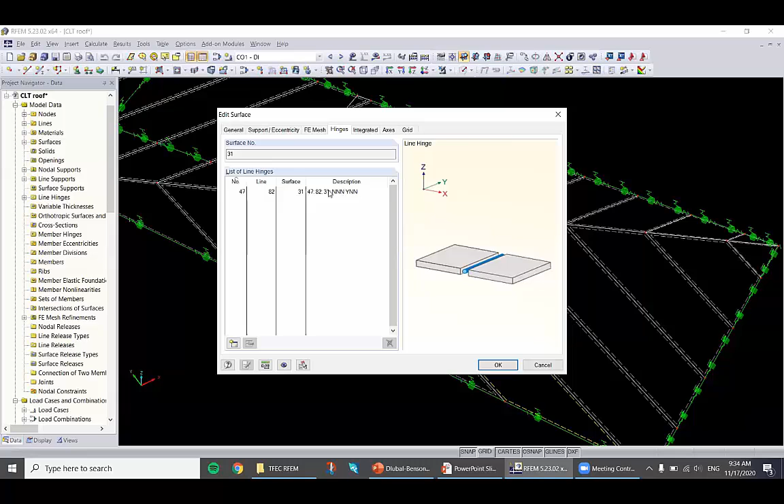It's essential to break up the model into actual panels, like the actual panel width, so that you can model the edge correctly from one panel to the other. Since this was only a concept, we did not go so far as to define the spring constants for the connections there, but we did create a moment hinge at the panel seams.

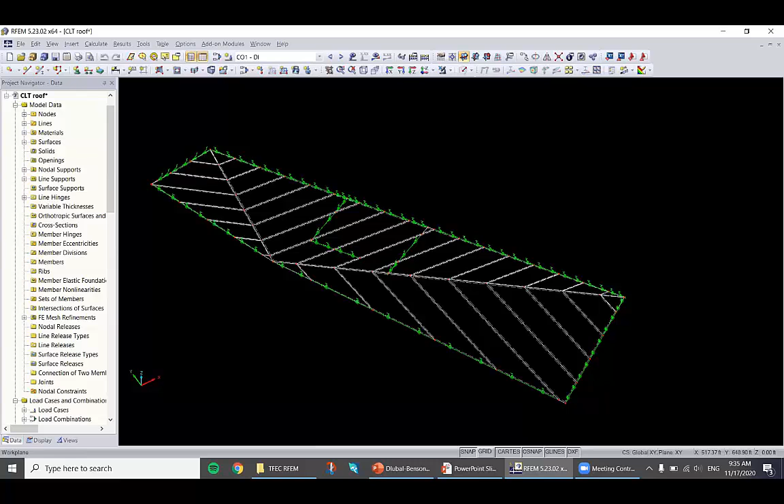Again, there's no beams in here. It's just supported by the exterior walls and those two interior walls. I'm not sure how to do this without an FE software. Maybe it's possible, but it's definitely way easier to do something like that with a program like RFEM, where everything is predefined.

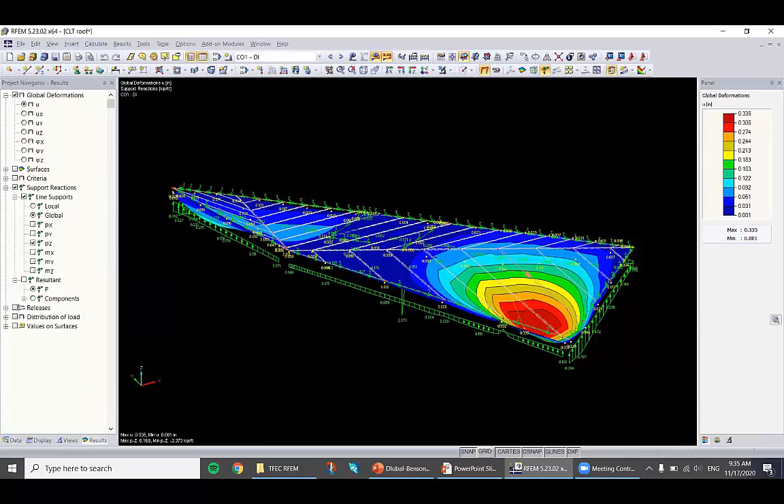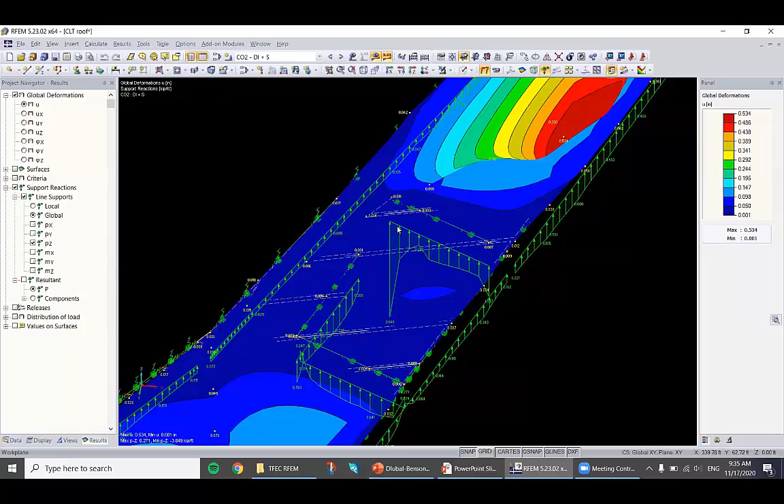This is the dead load deflection. The dead load and snow deflection is 1/2 inch, and so you would expect to get these load spikes here, and there certainly would be more analysis necessary to look into those locations. I'm very happy to hear that there is an average region available now. I did not know about this, but that is definitely something that will help a great deal resolving situations like that.

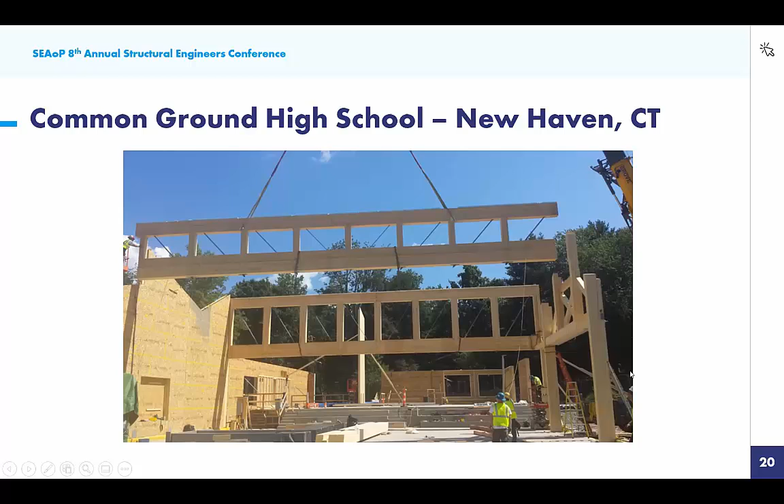This is one of the CLT applications. What you're looking at here is a CLT panel, and then those are I-joists. It's a very long span, and neither the I-joist nor the CLT on its own could span that far, but combined it was possible to span that distance. You can see there's a lot of screws in here to create a shear connection.

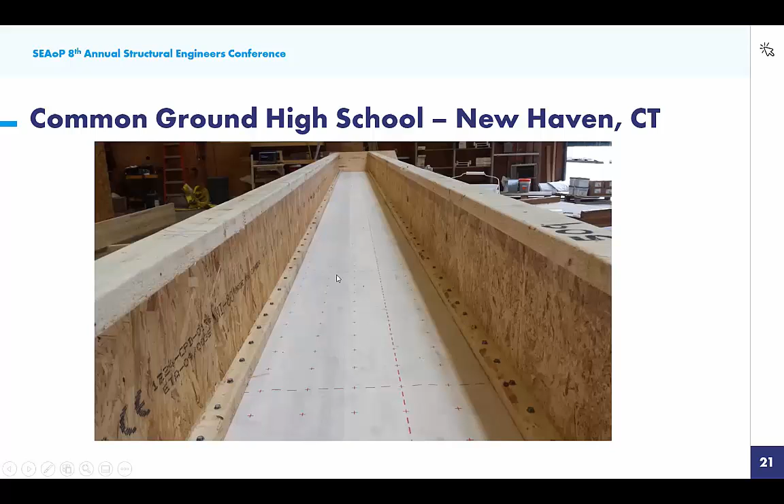Unfortunately, at the time we did not have RFEM yet, so there was a lot of hand calculations and probably some extra screws to be on the safe side. With a software like RFEM, this could be done much easier, and deflection results are way more accurate using an FE software.

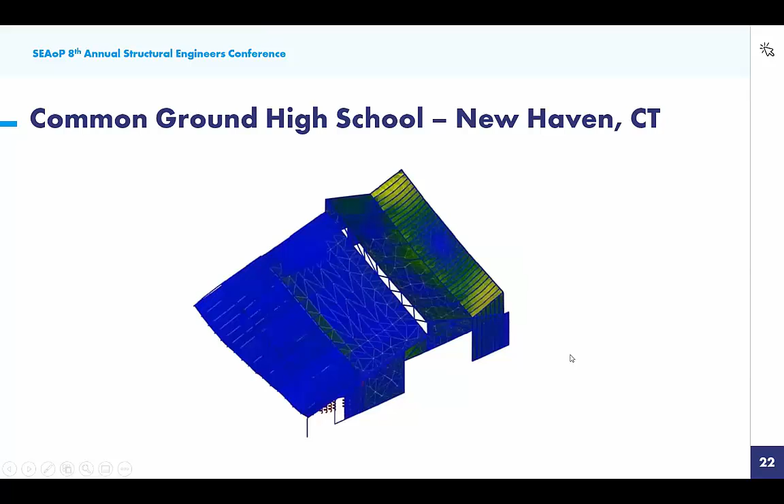This is the model that we used at the time, for a visual analysis. We did again use some diaphragm action here to hold up the roof. It was not quite as extensive as on the North Fork project, and in this case it was only sheathing - OSB, like 5/8 or 7/8. It would have been better to have a program like RFEM to really get the full potential out of the mass timber.

Which has a couple of advantages to using CLT there. It's not always possible to get the fire rating out of the CLT as needed for an elevator shaft - I think in this case as well, gyp cladding was necessary to get to code. But we still think it is a good investment to use CLT for something like that. One reason is material consistency - there's a lot less coordination necessary, fewer trades on the job site, and whoever builds the rest of the structure can provide the elevator shaft as well.

It's much faster installation time, and of course there is the advantage of carbon sequestration. As we all know, CMU, or really any other building material, produces carbon, whereas wood stores carbon.